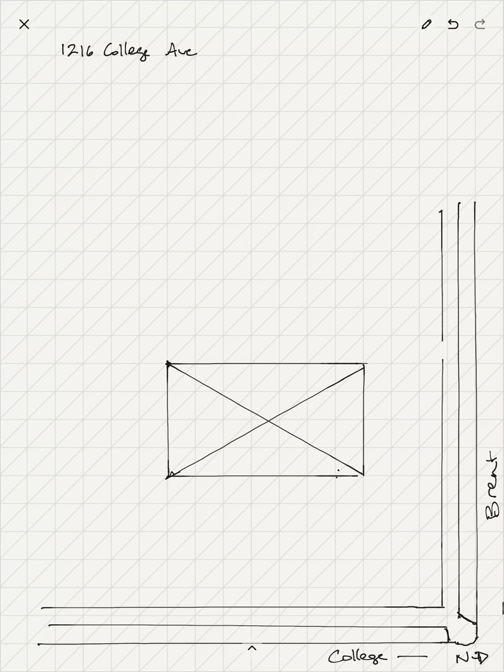All right, so don't worry about putting in a ton of detail, especially on the building. The building doesn't matter, right? The building, you just want to know where it is. So that's what I'm doing right now, is showing this building is in the middle, more or less, of this lot. Then it does have an addition on the back.

And it has a couple porches, one over here and one over here. This could be a little bit better drawn, but that's fine. All right. So then what you really want to add, again, what's really important here is the landscape. That's what matters. That's what is giving you an idea of how this lot is organized.

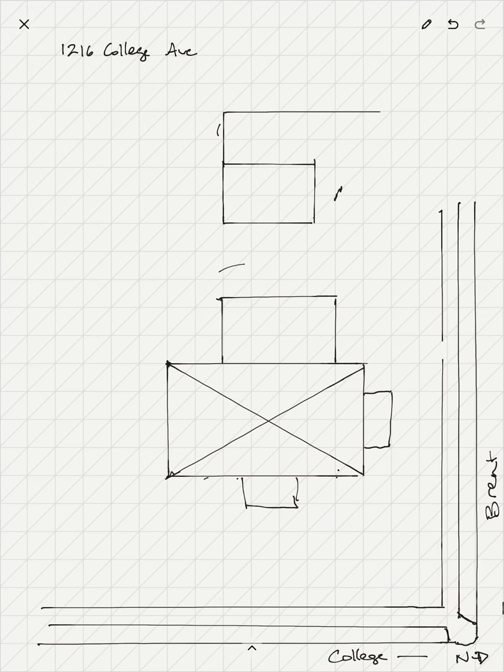So I want to emphasize, before you do this, walk around, get a good look at what's there, because sometimes it'll look like something from the front, and then you're in the back of the building and you're like, oh no, this is totally different. So please do yourself a favor, and always walk entirely around the property.

Make sure you see the whole thing before you start drawing, all right? Because otherwise you will absolutely 100% make mistakes, and you don't want to. That's a bad idea, right? So here I'm going to add this thing. So this is a shed.

So this is a good reason that you want to walk around the whole thing. That's very bad handwriting. Let's try that again. It might look like a garage, but if you take a look at it, you'll notice that it's actually way too small to be a garage. It's definitely more a shed. Okay, so there's a walkway in the front here.

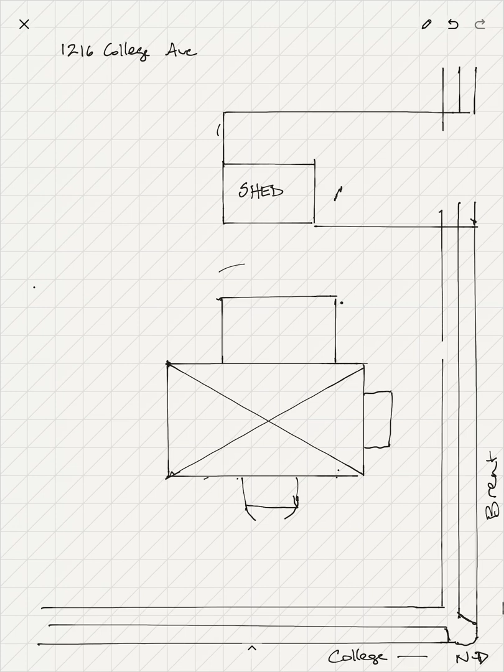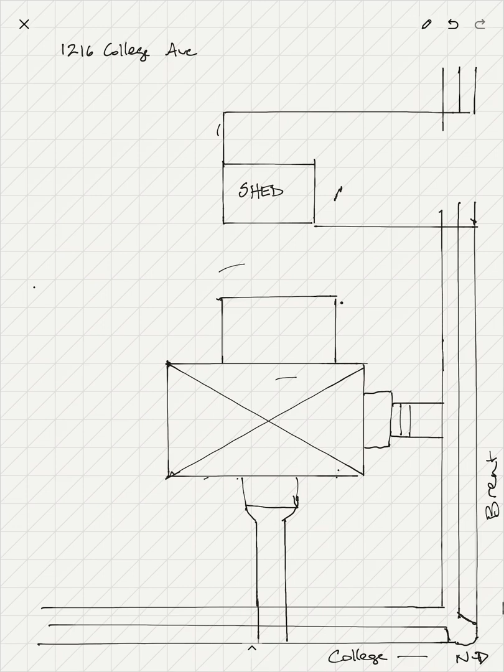And it goes all the way to the street. There's also a walkway here with a couple steps. Okay. Alrighty. And there's a porch here. And then we're going to see there's also a ton of fencing on this property, which is the really important thing that you would want to draw and make sure that it's there.

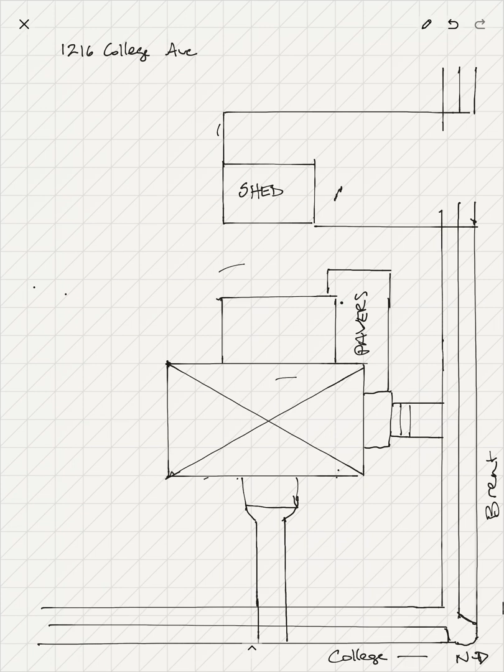So here we've got pavers. This is an enclosed porch. A stamped concrete walkway over here, and same over here. All right, let's see what else. Then we've got a bunch of shrubs and trees all over the place.

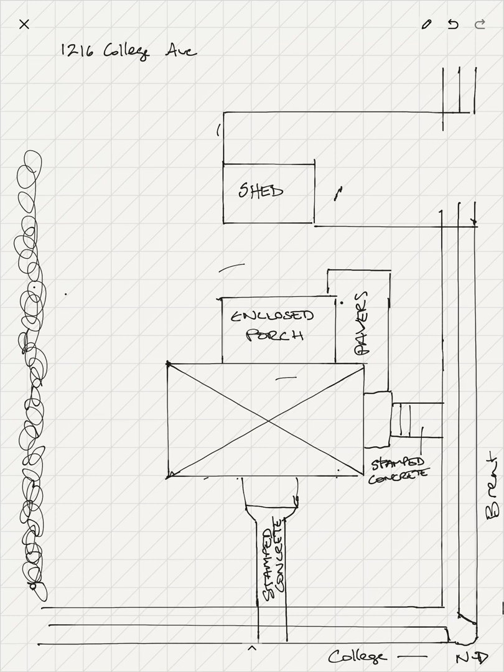When I draw shrubs, I just draw basically squiggles. You can do something more artistic if you want, but this is fine. Shrubs. Alrighty. Do a little bit of erasing here of the mistakes I've got.

Also notice that I'm only drawing in black. I'm not using any color here. Generally, it's really nice for being able to reproduce this stuff to make sure that it works in black and white, and it's not going to be a problem if it's printed. So that's something to note there. All right, back to this.

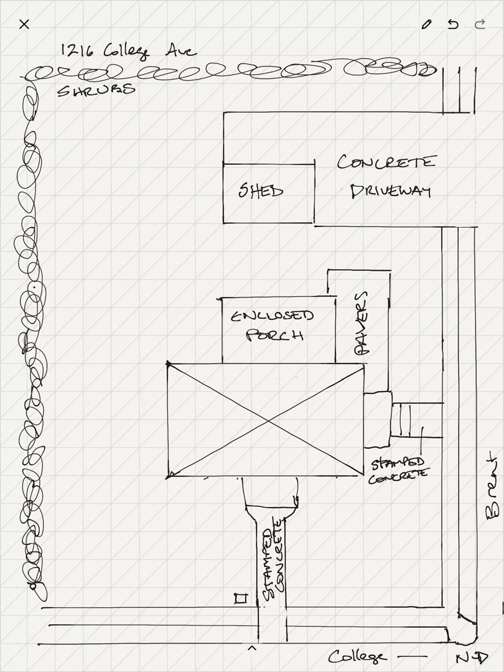So this is concrete. Please know the difference between concrete and asphalt. Concrete is gray and asphalt is black. So you should definitely be able to tell the difference very easily. Driveway. Okay, and then there's a ton of fencing, as I mentioned. So this is where you really want to make sure you've got the details right. So there's these blocks in multiple parts of the property.

Okay, and then there's the fencing. So there's some over here. And so this is, again, where you want to make sure you don't miss the details, because from first approach, this building looks like it's a single family house. But it's not. It's a two-family house. It's been divided up. And so it's really, really important that you note that you don't make that mistake, right?

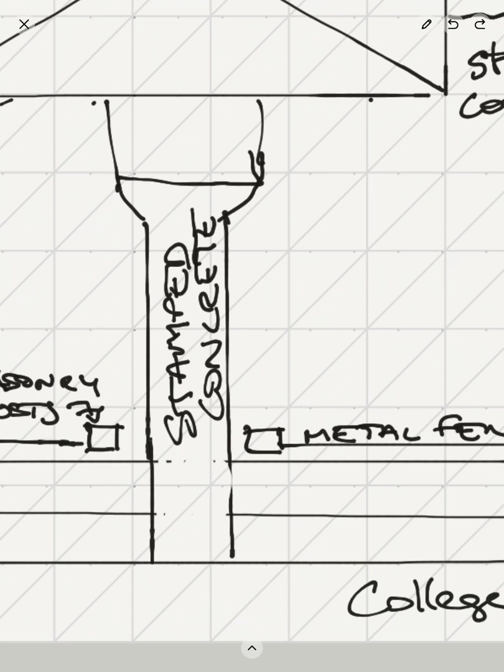So metal fence. And I guess these are like masonry posts. Sure. Metal fence. And I think that's pretty much it. Oh, I almost forgot. If you have a tree, which we do have a couple of those here. We have a tree right here. And let's try to make it actually circular instead of oval. Come on. This software is pretty good, but it's not perfect.

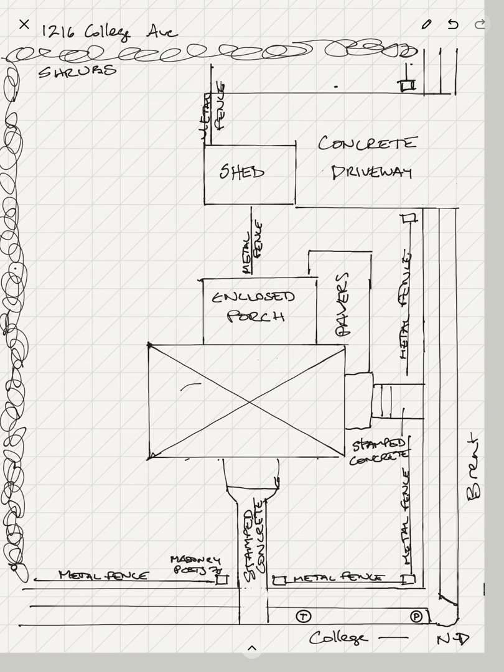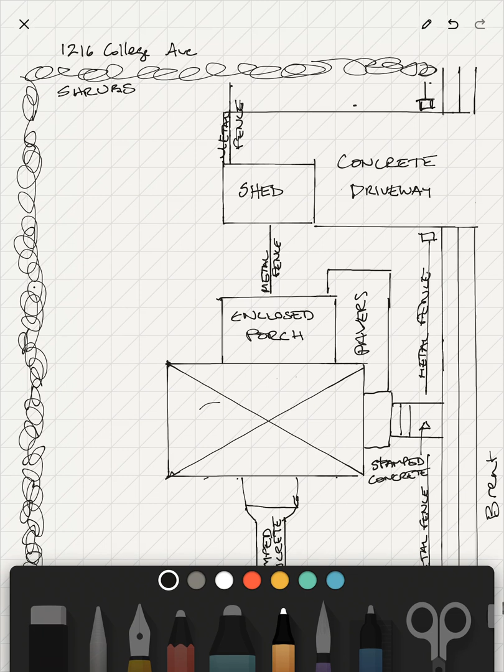And we also have a post right here. So I like to just write P for post and T for tree. Obviously, if it's a tiny little sapling, you don't need to write that. But if it's a big tree, it's useful to show where the footprint of the tree is. It's also really useful to show if there's some significant topography. So if there's a hill, which there isn't here, but if there is, it's nice to show where there's a hill. It's also nice to show if there's particularly prominent greenery, so plantings, that kind of stuff.

Anything that's permanent is stuff you're going to want to show. Anything that's temporary, you don't need to show. So for instance, the plastic slide that's in my backyard, who cares? I can pick it up. That you don't need to show. But a shed, a tree, and especially any surface, so driveways, walkways, fencing, that kind of stuff, try to give as much detail as you can.

Is it concrete? Is it asphalt? Is it gravel? Is the fence a privacy fence? Is it decorative metal fence? Is it a chain link fence? Try to put all that information in there. But again, the most important is always to put the address on first. That is crucial, crucial, crucial.